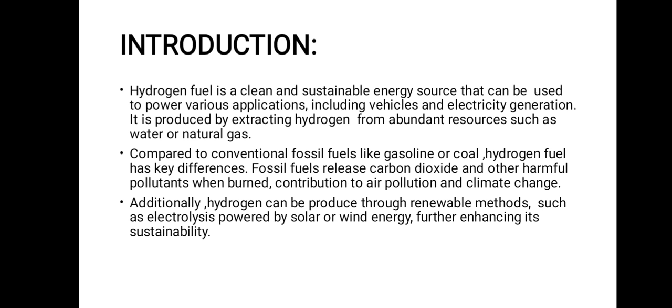Additionally, hydrogen can be produced through renewable methods such as electrolysis, powered by solar or wind energy, further enhancing its sustainability. Now move toward the next topic: properties of hydrogen.

First is high energy content per unit mass. Hydrogen has a high energy content, making it an efficient fuel resource. When burned, hydrogen releases a large amount of energy, making it suitable for various applications including power generation and transportation.

Next point is low molecular weight. Hydrogen has the lowest molecular weight among all the elements, which means it has a high energy to weight ratio. This property makes hydrogen an excellent choice for applications.

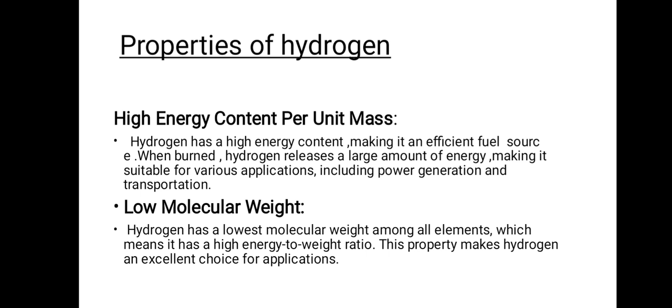Clean combustion: Hydrogen burns cleanly, producing water vapor as the only byproduct. This feature makes hydrogen a clean and environmentally friendly fuel, as it does not release harmful pollutants or greenhouse gases into the atmosphere. Next point is versatility.

Hydrogen is a highly versatile fuel that can be used in a variety of applications. It can be burned directly in internal combustion engines or used in fuel cells to generate electricity. Hydrogen can also be stored and transported in various forms such as compressed gas, liquid, or through chemical compounds in different industries and energy systems.

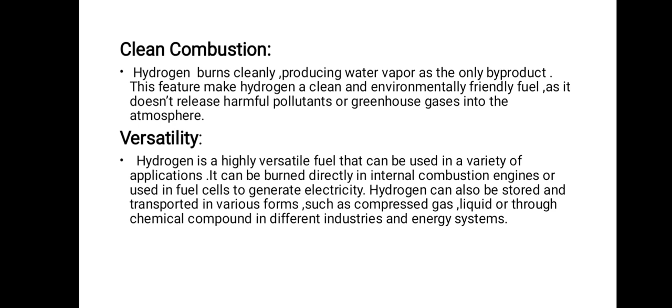Now move towards the next point: production of hydrogen. First of all, electrolysis of water using renewable energy. This method utilizes electricity from renewable resources such as solar and wind to split water into hydrogen and oxygen.

Electrolysis involves passing an electric current through water, causing the water molecule to dissociate. This process produces clean hydrogen without greenhouse gas for hydrogen production. And next point is biomass gasification.

Biomass such as agriculture waste or energy crops can be converted into gas through a process called gasification. This involves heating the biomass in a controlled environment with a limited supply of oxygen, producing a mixture of hydrogen, carbon monoxide, carbon dioxide, and other gases. The hydrogen can be separated and used as a fuel.

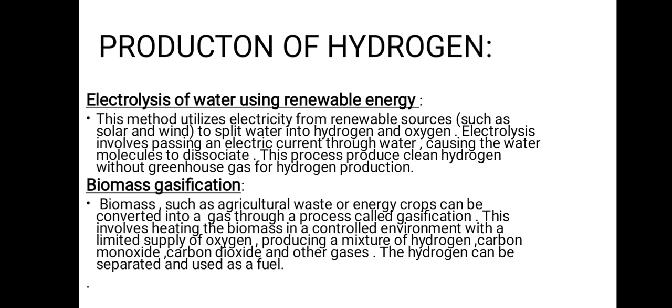Steam reforming of natural gas. This method involves reacting natural gas, primarily methane, with high temperature steam to produce hydrogen gas and carbon monoxide. This resulting mixture, called syngas, is further processed to separate hydrogen.

Steam reforming is the most common method for hydrogen production. It relies on fossil fuels and generates carbon dioxide as a byproduct.

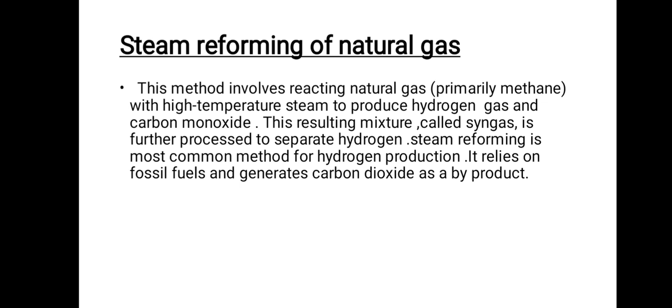Now move towards the next point: storage of hydrogen. First point is liquid hydrogen storage. And the first point is challenge: Hydrogen liquefaction requires extremely low temperature, resulting in high energy consumption and significant heat losses during storage and transportation.

The solution is improved cryogenic insulation techniques such as better insulation materials and vacuum-jacketed storage tanks, which help minimize heat losses and increase efficiency. Advances in the liquefaction process contribute to reducing energy consumption.

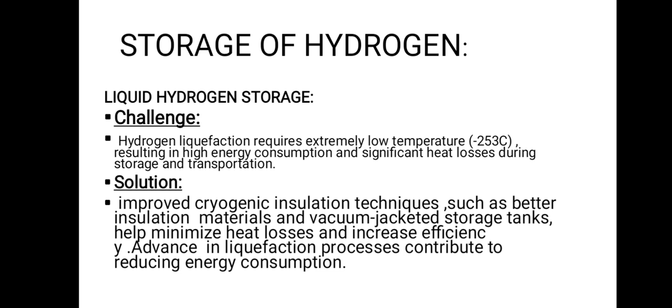Now move towards the next point: solid state storage material challenge. Finding materials capable of safely and efficiently adsorbing and absorbing hydrogen at ambient conditions and releasing it when needed.

Solution: extensive research is being conducted to discover and develop suitable solid state materials such as metal hydrides, complex hydrides, and carbon based materials. These materials can store and release hydrogen through adsorption and absorption for more compact storage.

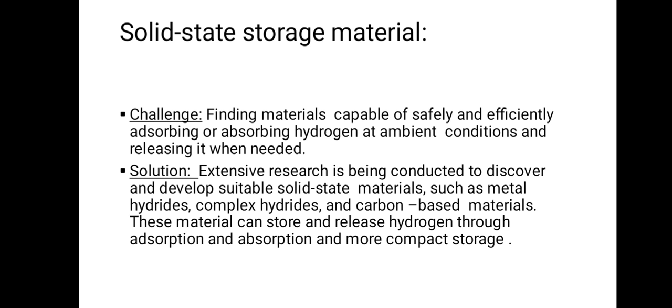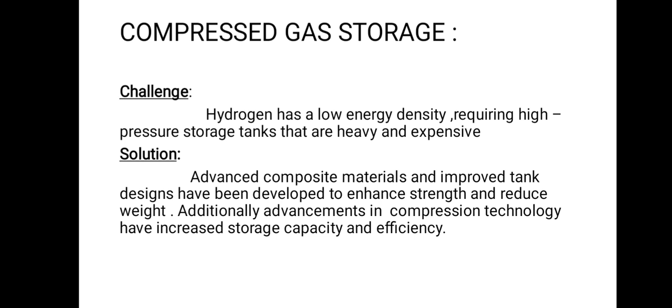Now move towards the next point: fuel cell. A hydrogen fuel cell is an electrochemical device that converts the chemical energy of hydrogen and oxygen into electrical energy. It consists of three basic components: an anode, cathode, and electrolyte.

First is cathode. The cathode is the positive electrode, also coated with a catalyst. Oxygen gas from the air is supplied to the cathode. The oxygen molecule reacts with electrons and protons that travel through an external circuit from the anode. This process is called reduction.

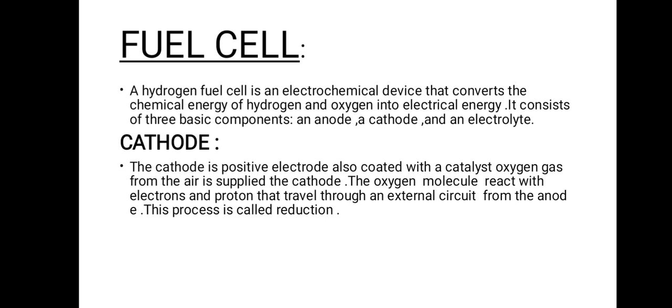Now move towards the next point: anode. The anode is the negative electrode, typically made of a porous material coated with a catalyst such as platinum. Hydrogen gas is supplied to the anode, where it undergoes a process called oxidation. In this process, hydrogen molecules are split into protons and electrons due to catalyst action.

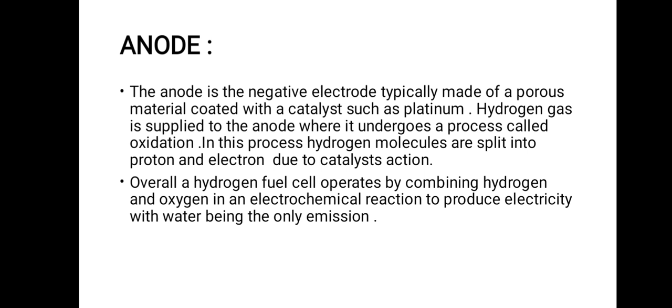Overall, a hydrogen fuel cell operates by combining hydrogen and oxygen in an electrochemical reaction to produce electricity, with water being the only emission.

Electrolyte: The electrolyte is the medium that allows the flow of ions between the anode and cathode. It is typically a polymer membrane or an alkaline substance. The electrolyte selectively allows the passage of protons, blocking the flow of electrons to maintain an external electrical circuit.

Next point is electrochemical reaction. As the electrochemical reaction occurs, protons from the anode pass through the electrolyte to the cathode. Meanwhile, the electrons, unable to pass through the electrolyte, travel through an external circuit, creating an electrical current that is utilized to power devices or recharge batteries.

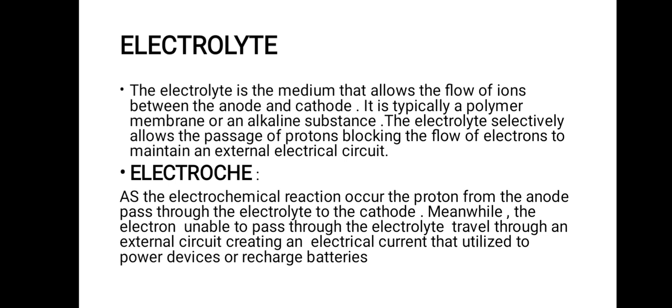Now move towards the next slide. Applications of hydrogen fuel. Hydrogen fuel has various applications across different sectors, including transportation, stationary power generation, industrial processes, and more. First of all is transportation, and the sub point is cars.

Hydrogen fuel cell vehicles use hydrogen to produce electricity, powering an electric motor. They offer zero emission transportation with longer driving range and quicker refueling compared to battery electric vehicles. And next point is buses. Hydrogen powered buses are being deployed in several cities worldwide, providing clean public transportation options.

And next is trains. Hydrogen fuel cell trains are being developed and tested as an alternative to diesel trains, offering quieter and emissions-free operation. Next point is ships. Hydrogen fuel cells can be used to power smaller vessels and provide auxiliary power for larger ships, reducing maritime emissions.

And next is aeroplanes. Hydrogen holds potential as a renewable aviation fuel, enabling zero emission flight when used in a fuel cell or as a direct fuel. Now move towards the next slide.

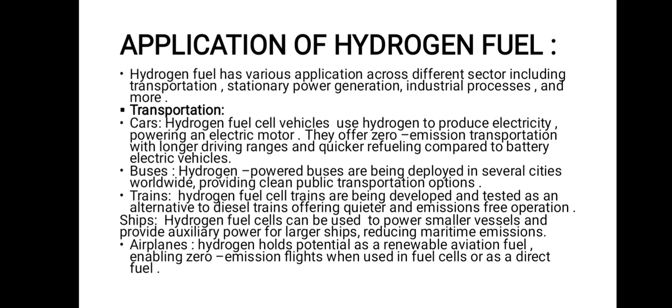Stationary power generation, residential and commercial buildings. Hydrogen fuel cells can provide clean and reliable power for heating, electricity, and backup energy in buildings. Power grid stabilization. Hydrogen energy storage systems can help balance renewable energy fluctuations and enhance grid stability.

Next is industrial process. Refining. Hydrogen is widely used in petroleum refining processes to remove impurities and increase product quality. Next point is chemical production. Hydrogen is a crucial element in the manufacturing of various chemicals such as ammonia and methanol.

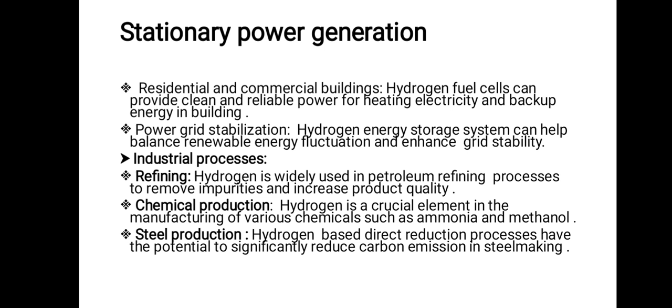Next point is steel production. Hydrogen based direct reduction processes have the potential to significantly reduce carbon emissions in steel making. Now move towards the next slide. Advantages and challenges. First of all, we discuss advantages.

High energy density. Hydrogen has a high energy content per unit mass, making it an efficient energy carrier. Fast refueling. Refueling a hydrogen fuel cell vehicle is comparable to refueling a gasoline vehicle, taking just a few minutes. Long driving range. Hydrogen fuel cell vehicles typically have a longer driving range compared to battery electric vehicles.

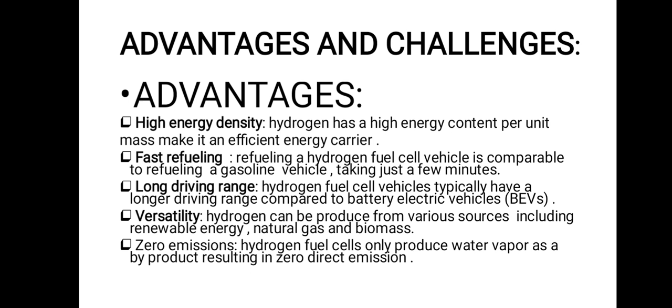Versatility. Hydrogen can be produced from various sources including renewable energy, natural gas, and biomass. Next is zero emission. Hydrogen fuel cells only produce water vapor as a byproduct, resulting in zero direct emissions. Now move towards the next slides, and this is the challenges.

Production challenges. The production of hydrogen often relies on fossil fuel resources, which can result in greenhouse gas emissions. Scaling up renewable hydrogen production is a challenge. Next point is infrastructure requirements. Hydrogen fueling infrastructure is currently limited, requiring significant investment to establish a widespread network of refueling stations.

Next point is storage and distribution. Hydrogen is a low density gas which requires specialized storage and distribution systems that can be expensive and pose safety concerns. Next point is cost. Hydrogen fuel cell vehicles are currently more expensive than traditional internal combustion engine vehicles and BEVs, primarily due to the cost of fuel cell technology and limited production scale.

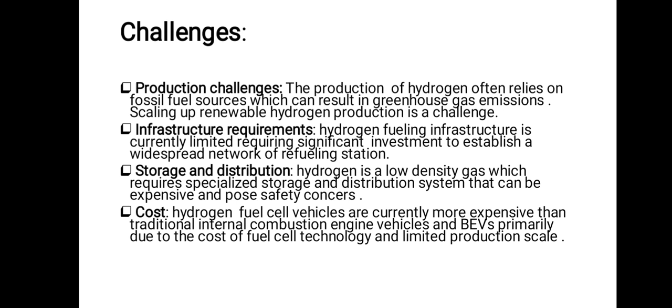Now move towards the next slide, and the next topic is latest research and development. The subpoint is improved catalysts for fuel cells. Researchers have been working on developing more efficient and cost-effective catalysts for fuel cells. For example, platinum-based catalysts have traditionally been used, but efforts are being made to reduce or replace the use of platinum with alternative materials like non-precious metals or metal-free catalysts. These advancements aim to enhance the performance of fuel cells, making them more commercially viable.

And the next point is new materials for hydrogen storage. One significant challenge in hydrogen fuel technology is efficient and safe storage of hydrogen. Researchers have been exploring new materials and techniques for hydrogen storage. Some promising approaches include using metal hydrides, porous materials like metal-organic frameworks, carbon based materials such as graphene, chemical ammonia, and liquid organic hydrogen carriers. Now move towards the next slide.

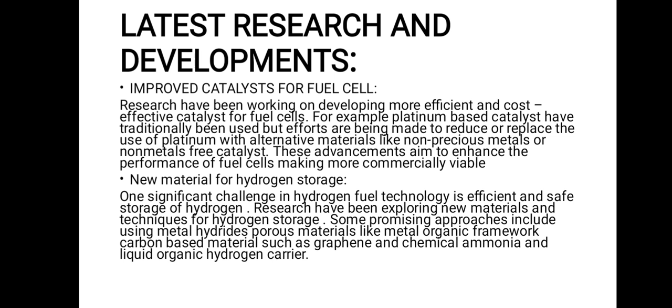Advances in production methods. Researchers actively work on sustainable and cost-effective approaches for hydrogen production. Advances have been made in water electrolysis, steam methane reforming, and biomass gasification. Integration of renewable energy resources such as wind and solar power into the production process has enabled the generation of green hydrogen with reduced carbon emissions.

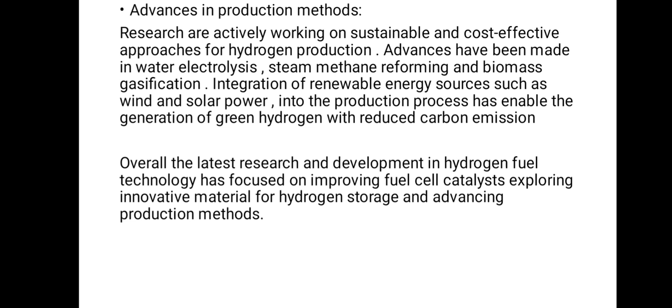Overall, the latest research and development in hydrogen fuel technology has focused on improving fuel cell catalysts, exploring innovative materials for hydrogen storage, and advancing production methods. Now move towards the next slide and the future outlook.